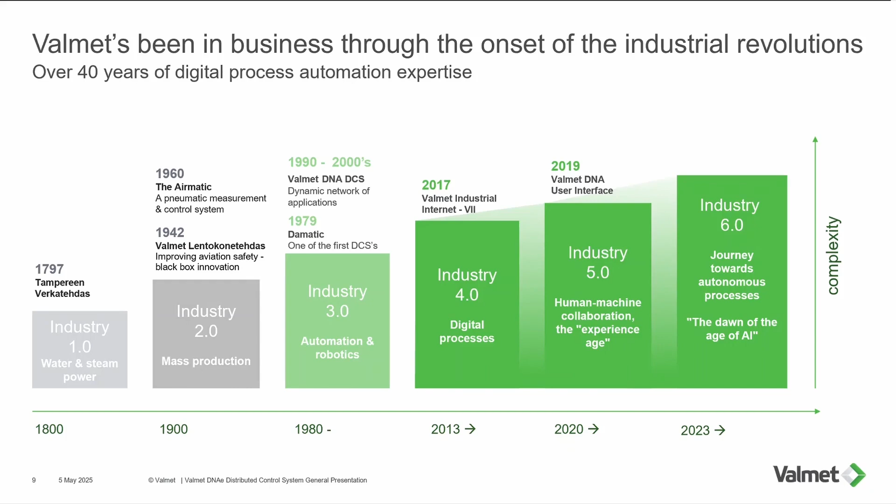This just says Valmet's over 220 years old. I know that sounds, as a Finnish company, a bit crazy. Really, if you go to the factory that runs the business that I work for, they manufactured and invented one of the first black boxes. So for aircraft, it was born from a black box, the controls and the pneumatics. That evolved into the late 70s and 80s, the first true DCS. That's evolved since then through the different years. This is just industry speak about the industrial internet, linking machines together, data, us launching a new user interface and then launching a new product.

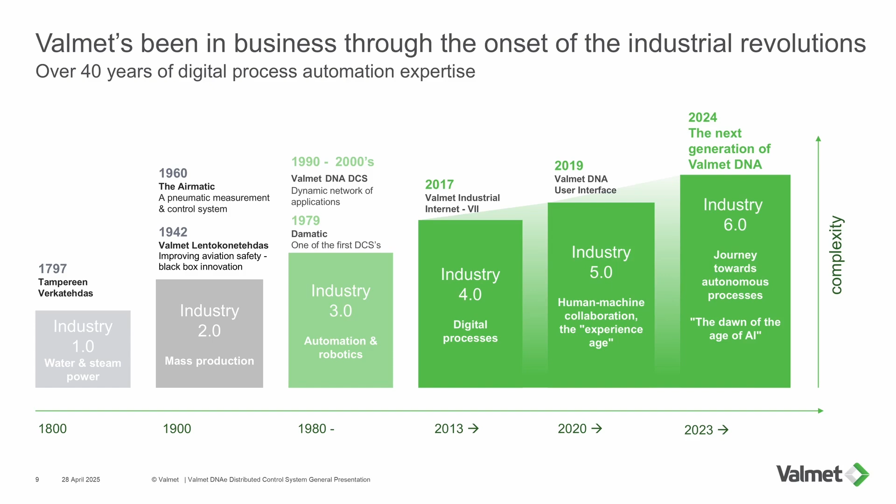The one thing that makes Valmet unique is every product that we've made since the 80s has been forward compatible. We've never left the customer high and dry. We don't make a product obsolete and say we can't support it anymore. So if you've got a system that was built in the 80s, it becomes a bit like Trigger's broom. You replace the hardware, but the code and the software will operate straight away. So you might replace the hardware, but that original code will still run in whatever we deliver today, tomorrow.

For a company you've never heard of, if you're in pulp and paper, you will know Valmet. They're between number 1 and number 3 in all pulp and paper machines industry. Globally, we've delivered 1,200 power plants. And again, you've probably never heard of us. You may have heard of Metso before. But trust me, 1,200 on a global basis is a lot. In the UK, the big niche is waste to energy. We always say between 60 and 70% of all the waste to energy plants have our control system installed, which makes it quite a good niche for us.

Marine, believe it or not, some of the biggest ships in the world, including the modern cruise ships, and that's like doing a small floating city. I think the biggest one, the Icon of the Seas, which is the biggest cruise ship, has got a Valmet control system, and they have literally hundreds of thousands of data points. And process industries, it's not like a best kept secret. We do loads in Finland. If you ask me for any experience, we've done it in Finland because we're a Finnish company. We do refineries in Rotterdam, but we don't really do UK ones. It's just the way Valmet is.

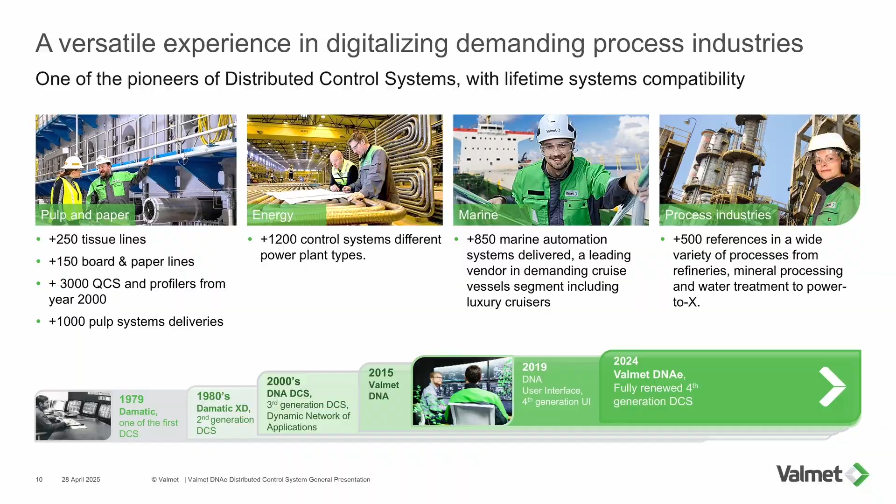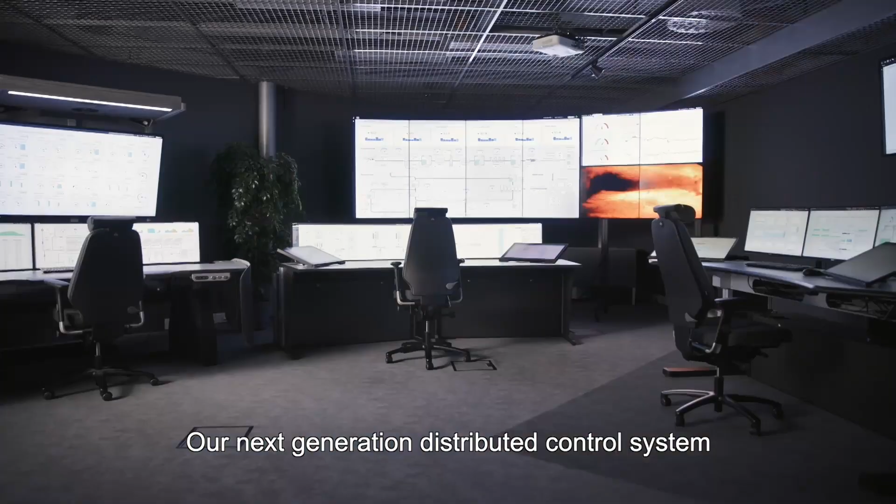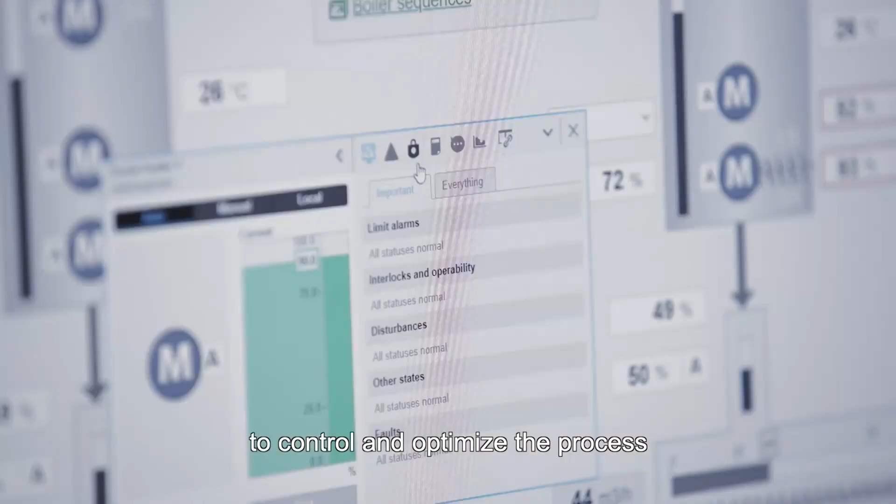Life is full of challenges. In life, you have to be ready for the unexpected. Ready to evolve. Our next generation distributed control system, Valmet DNAe, is ready. It carries generations of innovation and experience and is designed for efficient operation and easy onboarding. We understand that people are behind your success, and our fully web-based DCS lets your team experience control at every level. Global collaboration is effortless with the right information at hand for every user, remotely or on-site. With advanced analytics and reporting tools, your team has the facts they need to control and optimize the process to meet your production, quality, and environmental targets.

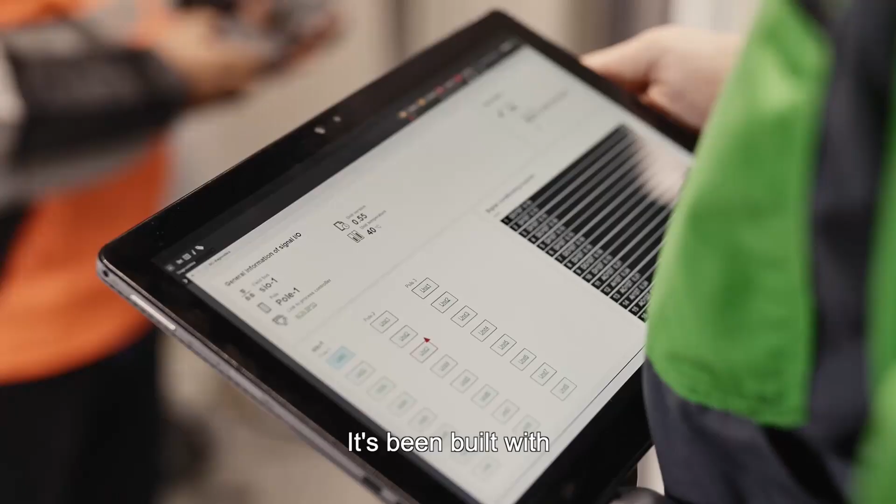The system helps you pave the way towards the autonomous operations of the future. Valmet DNAe is easy to implement, configure, and maintain. It's been built with lifetime compatibility and support. When situations change, it's important that you have a system that keeps you aware, in control, and ready for the challenge. At Valmet, we believe in collaboration and long-term commitment to move your performance sustainably forward. Our new DCS has been built for you to experience control at every level.

So you see there from the control room, probably quite a lot different from what you're used to seeing in terms of just the layout, really. I was asked to make it not too techy and not too much of a sales pitch, so I haven't got loads of detail on the screens and everything, but those curved monitors, to be fair, I was hoping to show you how we do it, but can't get on the network here.

Those 49-inch curved monitors allow you to build up the system however you want it as a user. So instead of having, historically you would have just seen loads of fixed screens and people dragging stuff across from a screen. But the new system, you can have video walls, these curved screens, monitors, really sort of innovative stuff.

And we now do what we call a UX design, where we go into a control room. We always find it a struggle, certainly as a sales guy. If you asked an operator to design a system, it would probably be fantastic because they operate it on a daily basis. As a sales guy, we end up talking to a contractor and someone who designs it, and we end up with, not cheapest chips, but the lowest point over the fence kind of thing. So, as cheap as you can make it just to get that job over the line.

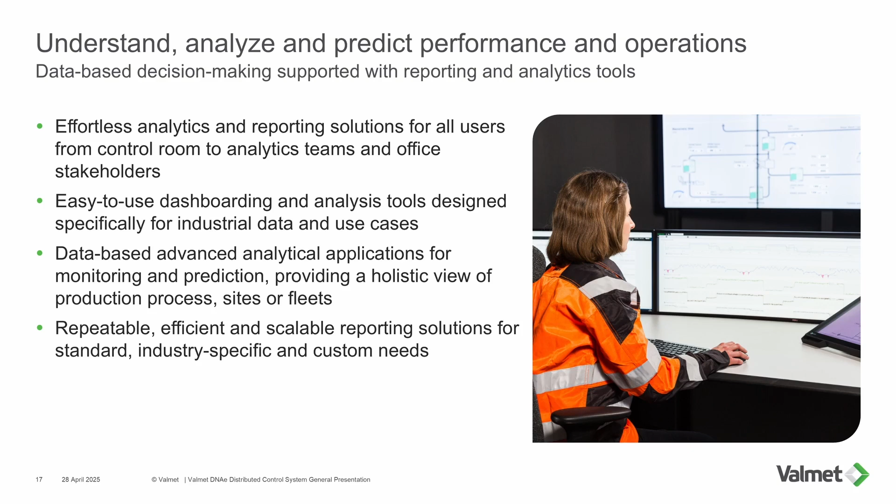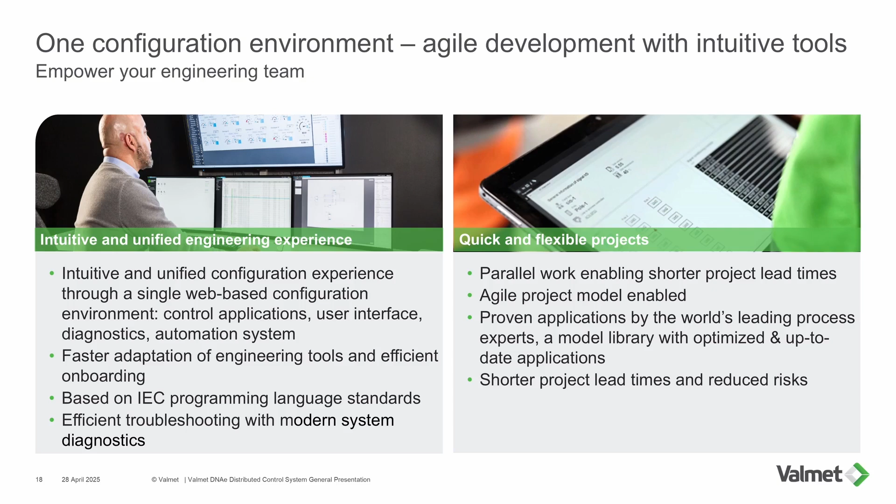We obviously offer training courses. So we'll do extensions and sell those things. But again, quick. Like I say, in the UK, got a great support team. So if it's small add-ons and things, we can deliver it. If it's something larger, the way we're structured, I haven't really talked about, but the same engineering teams that deliver capital projects can do extensions and things like that.

So again, from an end user point of view, how do we reach your production, quality and environmental targets with the control system? So again, it's a high availability system, both in terms of hardware and software. The hardware is a Valmet product. We don't use other people's I/O. It's our own hardware. We write the software, so it's not like certain manufacturers that have licensed assemblers, integrators. We do that, but only in niche industries. If we sell a project, we deliver the hardware, factory test it, and write all the software as well, with the cybersecurity built in.

Long life cycles. So I'd say waste to energy, probably a lot of the waste to energy plants, 25 years minimum run, and then some after that. The ones that were 25 years old, or even older than that now, are getting life extensions and things. So we have to sign up to support that for 25 years. So again, what I said earlier about always being forwards compatible, we're always able to support it. We've never left anyone high and dry and slammed the phone down saying we can't do that anymore.

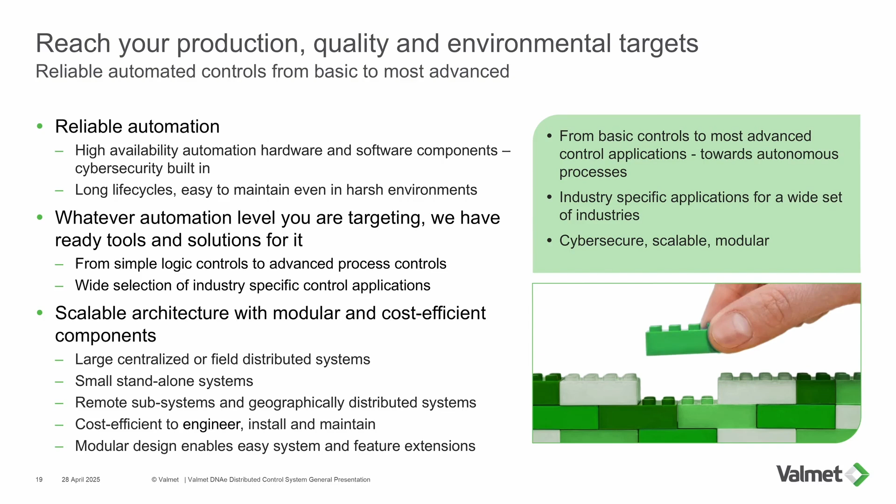We don't get too much request for it in the UK, but we've got some batch controls for breweries and things like that. We can do machine controls and drive controls. Obviously been doing that, paper mills and things, a long time.

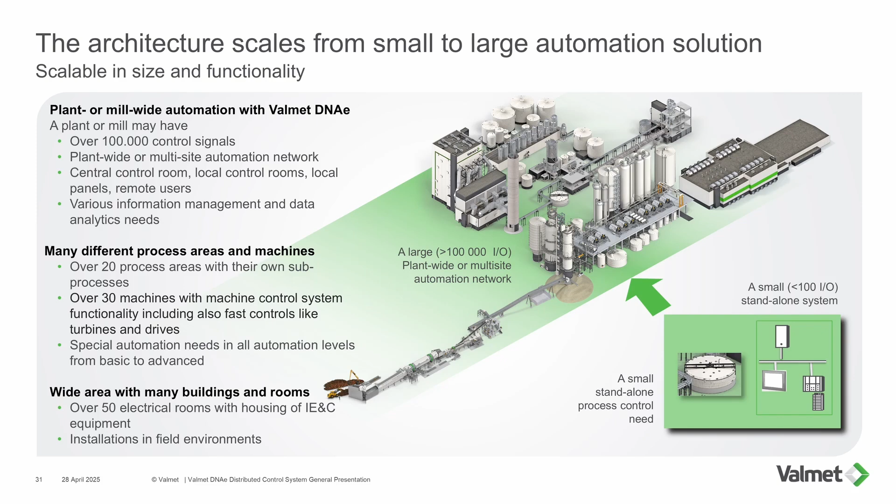Try and fly through some of this, concerned about the time. So again, this is the sort of platform. A lot of things I've already talked about in a different graphic. We've already had this slide. So this is again something I was saying about the size and the architecture, looking at a plant-wide solution. I'm guessing that's a Valmet boiler, something I didn't tell you we made, maybe there in the corner. So these are like hundreds of thousands of signals, different process areas. Not too worried about that, just telling you how great we are. We can do everything from a small system with 100 I/O. Already said that. So the big stuff.

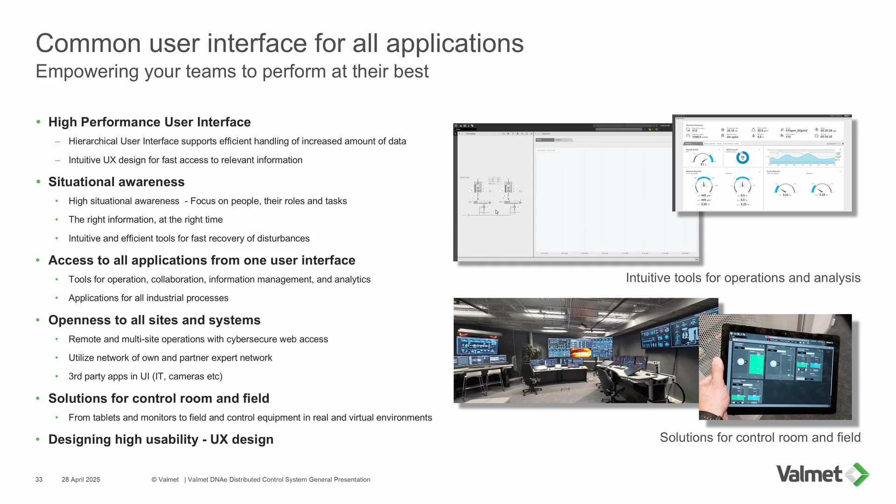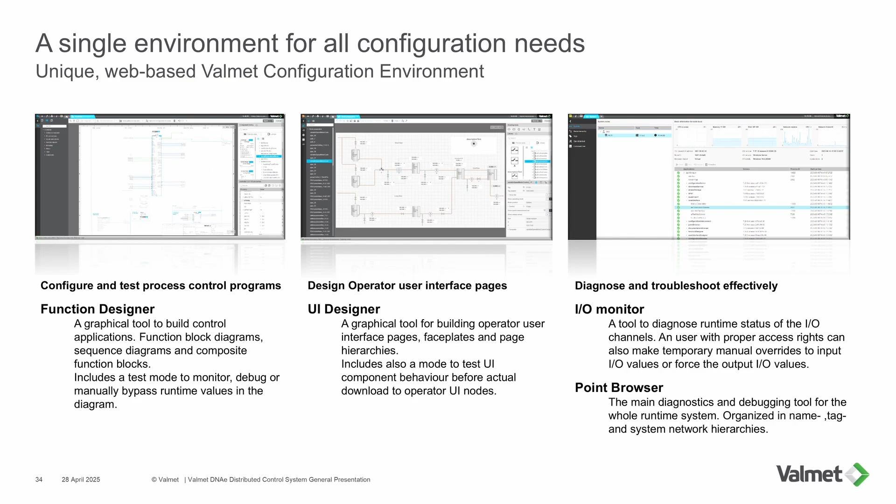So again, this is about the design, the tools that we use, how you configure it. I'm not sure you guys are too worried about how we do that. Data management, so collection and storage, the models that we use, the tools, the dashboards, the reporting. Again, things that I've already touched on.

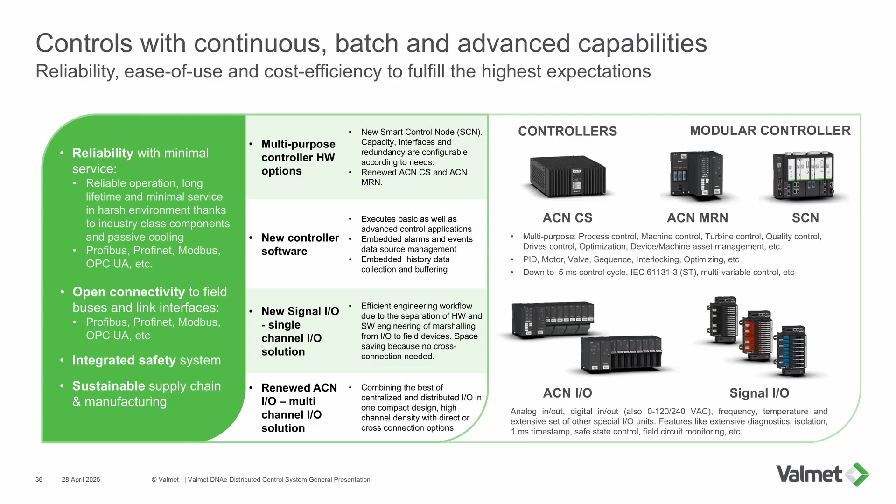More on cybersecurity. As I say, you'll have heard me say this quite a bit. And that's it. I'll try and leave 15 minutes if anyone's got any questions.